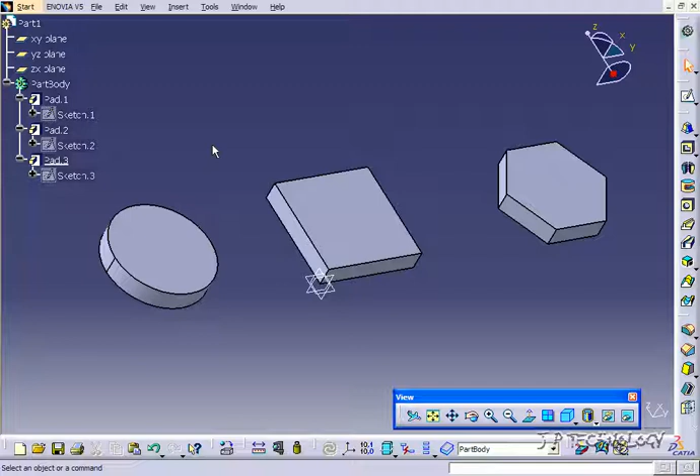So what we're going to be doing is creating a sketch on these solid bodies that we've made, and we're going to do the drafted fillet pad off of it. Now, the drafted fillet pad saves you time as it introduces 3 features into one step. In this one step, you're going to be extruding the part, drafting it, along with adding fillets all over it. So this tool is a real time saver, as it combines 3 steps into one quick and easy step.

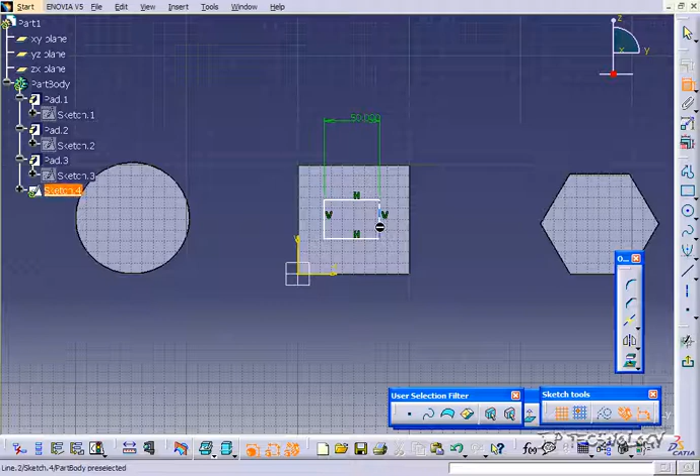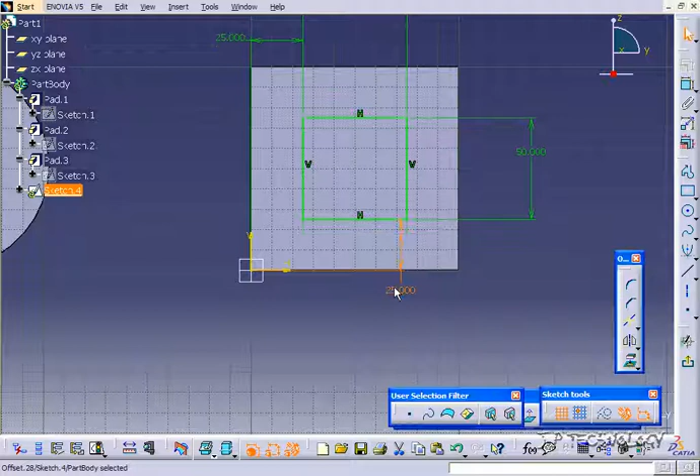So to start off, let's do one on this face here. Let's click this face, click Sketch, and let's sketch a square on the face here. And let's dimension it to 50 by 50. And then let's dimension it from the origin here. So let's make it 25 by 25. Now we've got our sketch right in the center of the solid body. So let's exit this workbench and let's apply the drafted fillet pad.

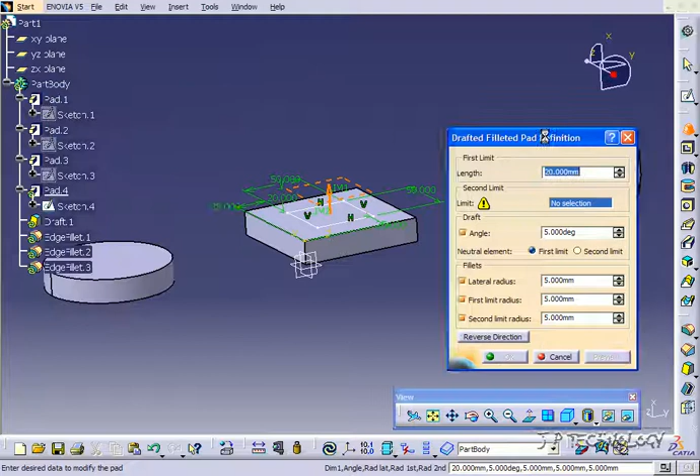So click on the sketch and let's click the drafted fillet pad, and we get the drafted fillet pad definition window here. So we're going to have to go through it and add and select the parameters. With this type of pad though, you're limited to only doing a dimension. So for the length, you're not able to do an up to or up to surface with it.

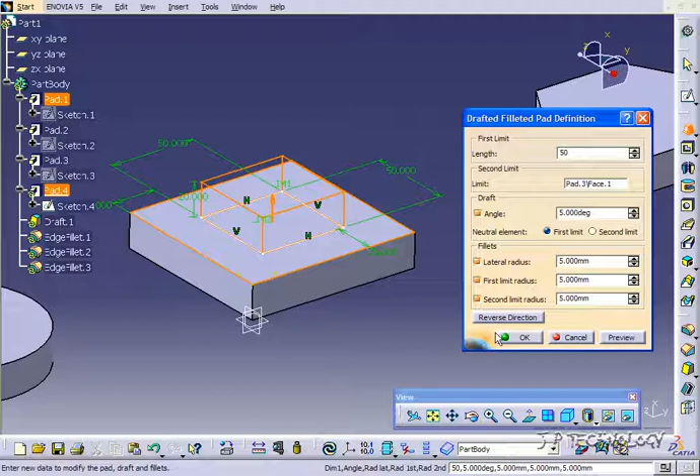Now for the second limit, click the face that you're extruding it off of. So click this face here, and you're able to toggle on and off if you want a draft angle or if you want the fillets. For now, turn everything on, and everything's set at 5 degrees and 5 mil. Leave that, and let's put this up to 50. Now let's click OK and see what we get. And we get our extrude with the draft and the fillets.

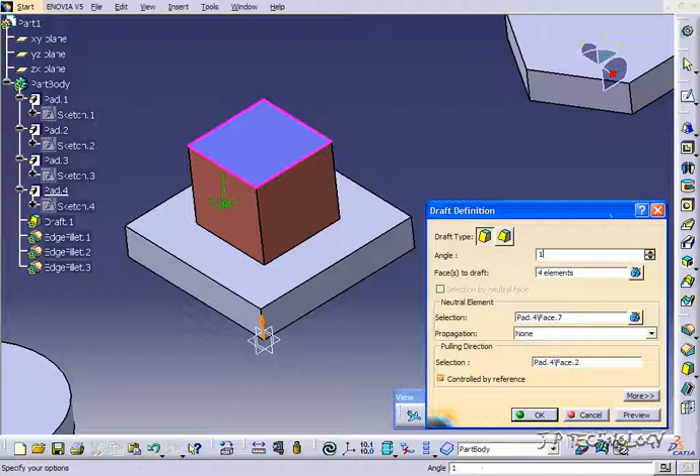Now if you notice, with the draft angle of 5 degrees from the top point here, it's drafted out, and when it creates this feature, you're going to get a pad, a draft, and all of the edge fillets. So from there you're able to change the pad, the draft, or the edge fillets just by clicking on them. So let's change the draft angle. Let's double click on it, and change it from 5 degrees to 10. Click OK, and now you can see that it's kicked it out much more.

Now let's delete one of these fillets, and you can see that it takes it off on all those edges. So you're able to go in and modify the pad, the draft, and the fillets after it's been made. Instead of getting back into this one menu for the drafted fillet pad, each of them creates its own feature under the part body.

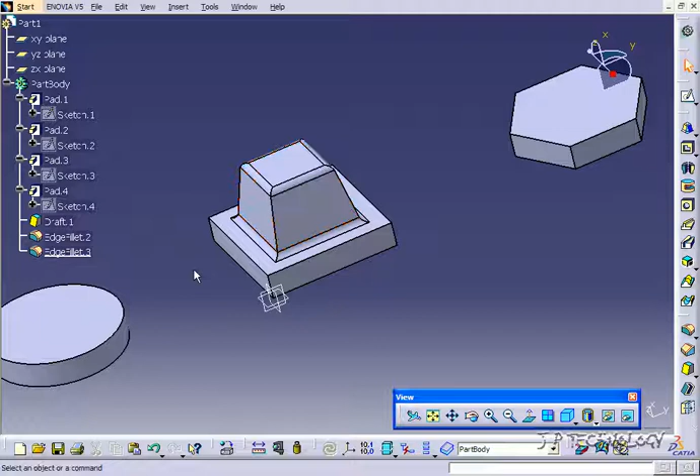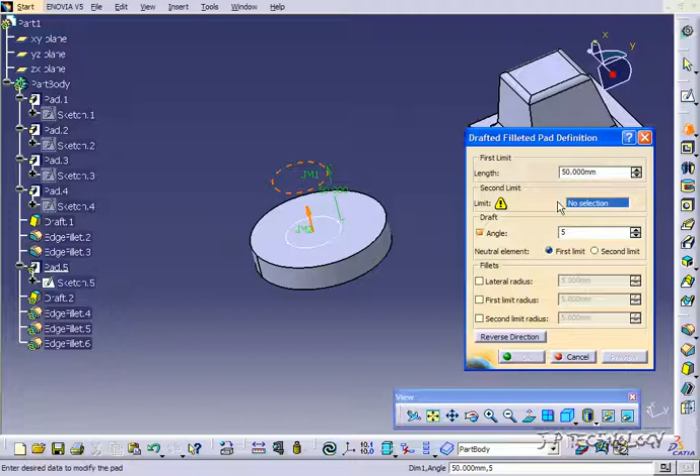So now let's do one on the circle here. Let's click this face, click Sketch, and let's just sketch a circle close to the middle. Don't worry about the dimensions. We'll go out, click on the feature, and this time let's only make a draft. So we'll take off all the fillets, and we'll make the angle here 5. Now for the limit, we're going to choose this face here, click OK, and now we've drafted this out just 5 degrees with no fillets.

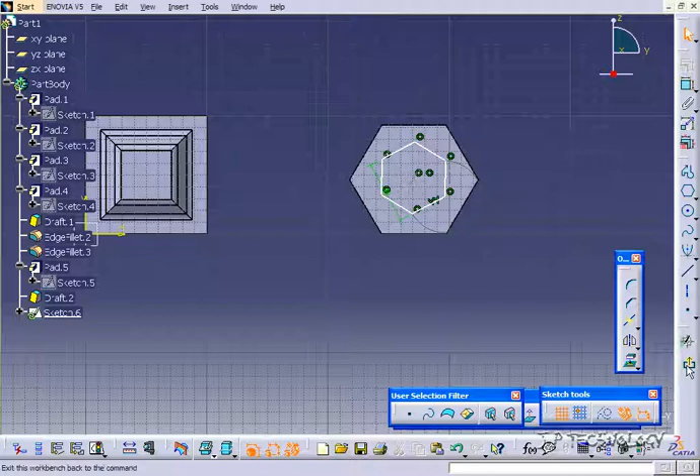Now let's do one last one on this face here. Let's click it, click Sketch, and let's use the hexagon. So click and pull it out. Now let's go back out and use the feature. This time let's unclick the draft angle and click this face here. So what we're going to have this time is just fillets and no draft angle. So let's click OK. And that's exactly what we get. No draft on it, just the fillets.

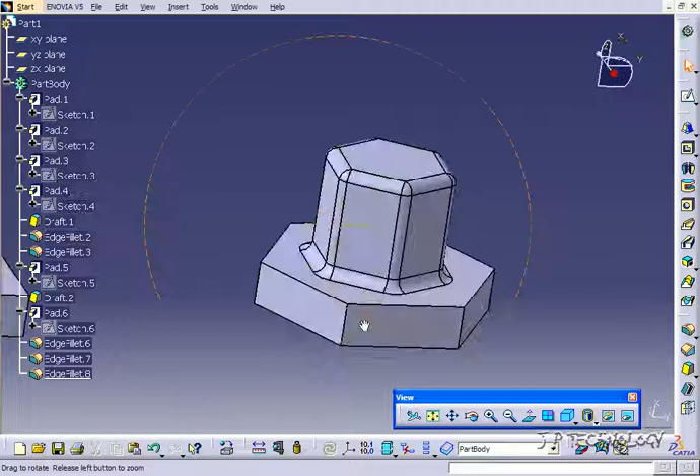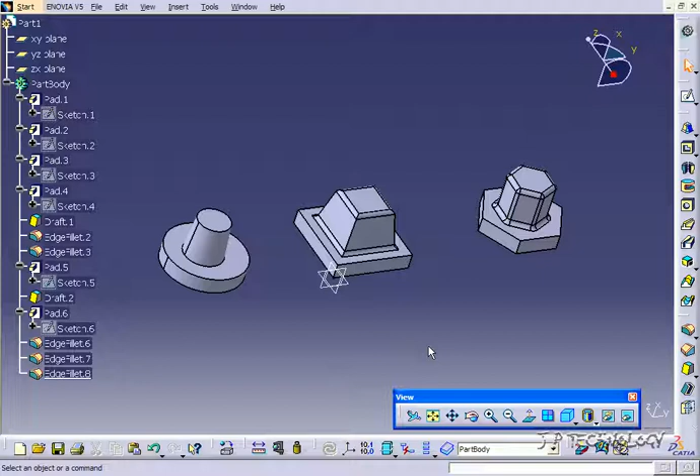So this tool allows you to incorporate the drafts, the fillets, and the pad all in one step. Like I said, it's a time saver, as rather than going through 3 separate steps, all you have to do is one step and you get your 3 features from the one sketch. And that concludes our tutorial on how to use the drafted fillet pad within CATIA V5.